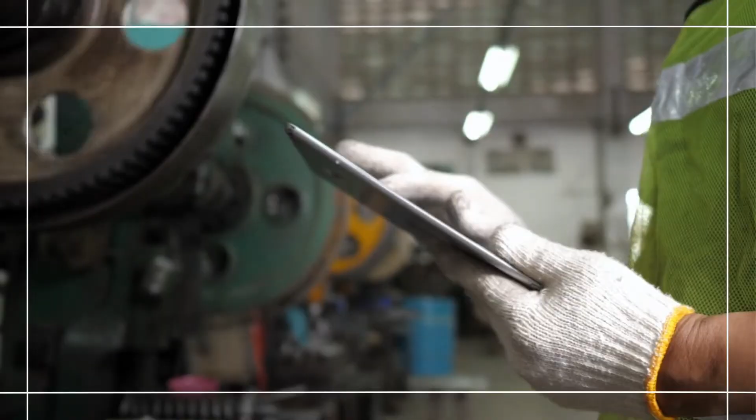Earth has been experiencing a major environmental issue. Oceans, forests, beaches, and all natural habitats are affected by an abundance of plastic litter. But plastics could be recycled more and better. With new technologies, plastic landfill stands to be cut significantly. One option is the valorization of the materials into new feedstocks, and that's where the new EU project, PLASTICE, comes in, closing the loop in the plastic life cycle.

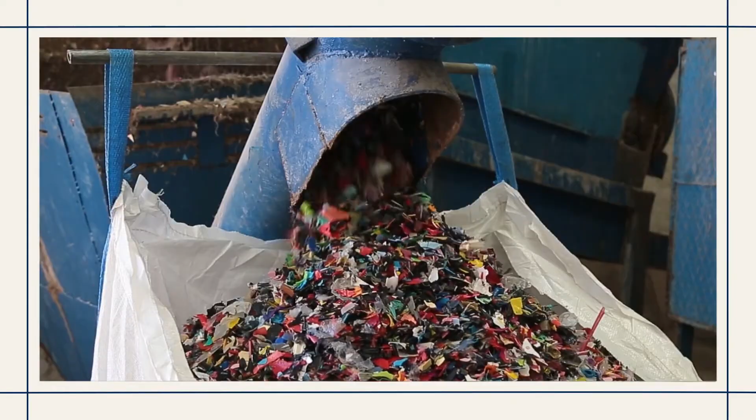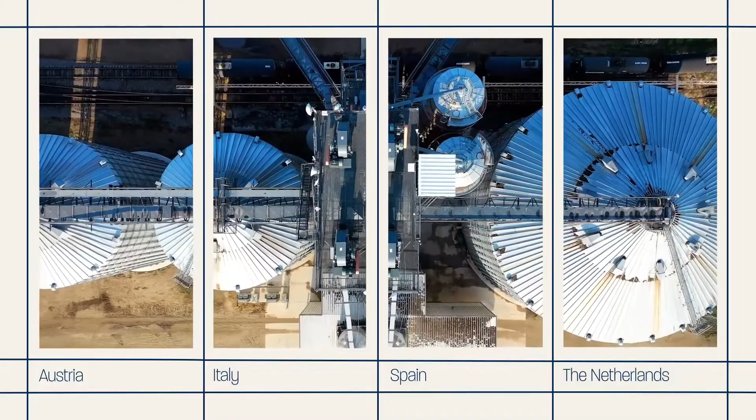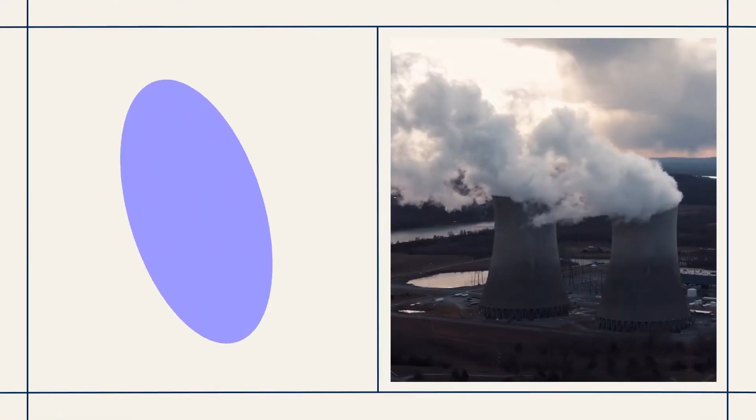PLASTICE strives to apply valorization processes aligned with the latest chemical conversion technologies in 4 countries: Austria, Italy, Spain, and the Netherlands. 4 conversion technologies will be developed at these demos, from lab scale up to real environment prototypes. Microwave-assisted pyrolysis, hydrothermal liquefaction of polyolefins, combined gasification and chemical post-treatment, and cascade enzymatic hydrolysis. These technologies aim to reduce greenhouse gas emissions by 70% overall. Learn more at plastice.eu.

So with that, we have set the stage so I can explain a little bit what we are doing in PLASTICE. We are a rather large consortium, and we have different routes where we want to use the plastic waste which is collected and sorted, and where we have different fractions. For example, we have different plastic materials where we want to use our microwave-assisted pyrolysis or the hydrothermal liquefaction to go back to pyrolysis oil.

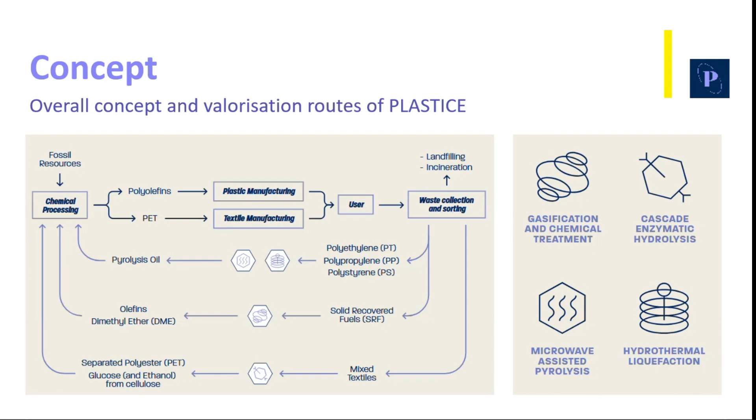The second thing we're doing is to take the solid recovered fuels and by the combined gasification and chemical treatment, we want to go back to olefins and dimethyl ether. And the third one is maybe a little bit the odd one out here because we don't put the material up to high temperatures, but we use mixed textiles, where a reasonably large component is plastics, and we use an enzymatic treatment to separate polyester fibers from glucose.

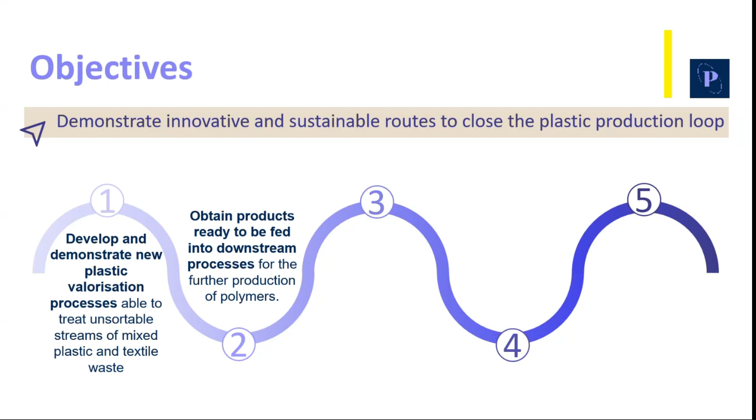Yeah, what are the objectives in our project? The first one, as it's about demonstration, is to develop new plastic valorization processes and to demonstrate them at a reasonable scale, especially for these unsortable or low valorization materials for plastics and the textile waste, because there is a reasonable share of plastics in that. The second one is to obtain products which are ready to feed into downstream processes for the further production again of polymers, as we showed before.

The third is to reduce the carbon footprint of the current chemical recycling processes, especially for the fractions which cannot be mechanically recycled. And there the animation messed up. We also want to establish the roadmap for the implementation of our solutions into the industrial realities and regions, tackling the technical and non-technical barriers. And yeah, sometimes you really get non-technical barriers in such a short project. And another is to ensure the successful dissemination and exploitation of the project. So we're also looking into the business models. Can this be feasible or not?

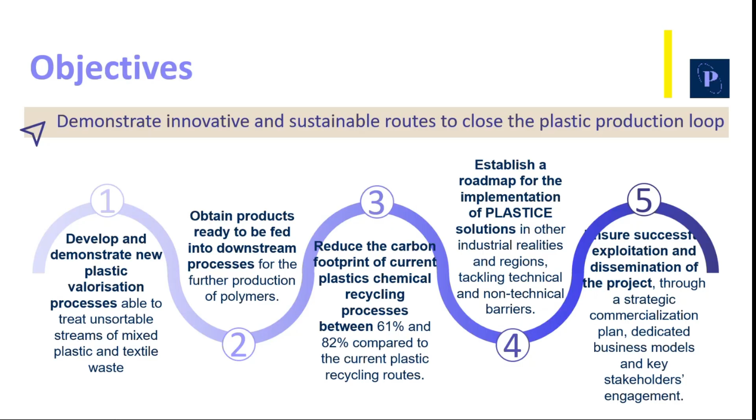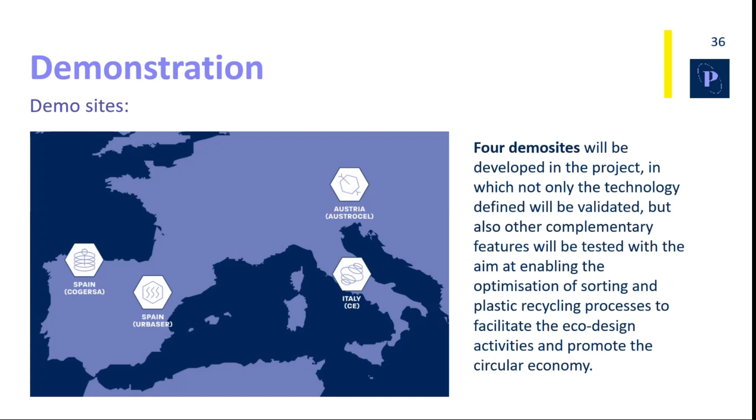Our 4 demo sites are shown here. We have 2 demo sites in Spain, one in Italy and one in Austria, where we deal with the different technologies. And I will show you in the next slides what we are doing there and what's the current status of that. First one, the microwave-assisted pyrolysis.

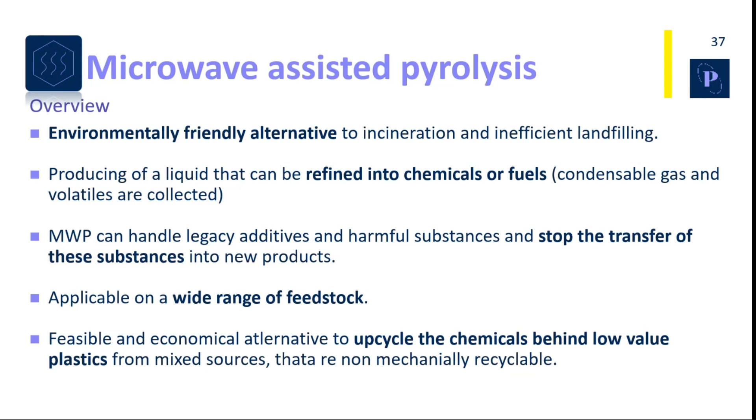Yeah, we see this as an environmentally friendly alternative to incineration, and especially to inefficient landfilling. We want to produce, as a similar approach as in your projects, a liquid that then can be further refined. And with this municipal plastic waste, with the microwave pyrolysis, when we pyrolyze the material, as in all pyrolysis processes, we don't have an issue with some legacy additives or something like that. Also, we want to apply this to a wide range of feedstock, and we see this as a quite feasible and also economical alternative for mixed plastic wastes. So what are we doing there? What's the basis of that?

We basically use microwaves as we use at home in your kitchen, but at a little bit larger energy, between 300 megahertz and 300 gigahertz, and we use that to bring the energy into the mixture. Not only the plastics alone, that wouldn't work. So we need some catalysts. We need some stuff which is susceptible to the microwaves, and with that we can heat up the material very, very rapidly.

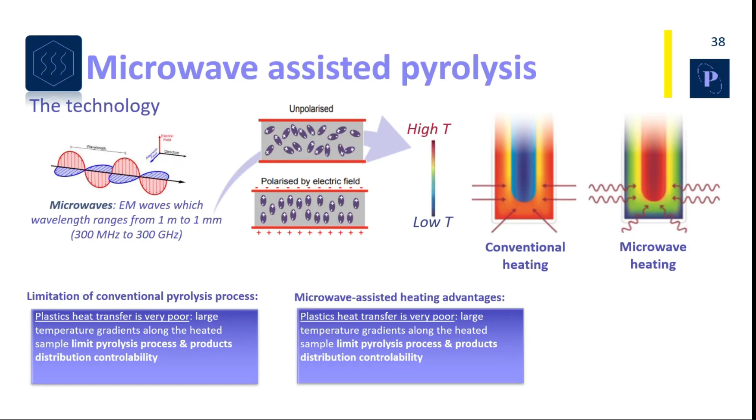With the microwave heating, as the microwaves can penetrate the material much better, we heat it up from the inside, and with that we get a very nice rapid heating. And due to the low thermal conductivity of the plastic, we have the insulation around, so it stays also rather hot.

What's the status of that? Here you can see the prototype or demo setup at the Spanish site at CIRCE. CIRCE is also the coordinator of the project. You can see here such a microwave reactor. It's a continuous microwave reactor concept.

Basically, the start was first a small tube-shaped reactor where the material was fed in. The microwaves are penetrating, and now they set it up at the larger scale with this pilot plant. So that's the current status of that. That's currently running. They're currently being optimized, and the major input they're currently looking at is the LDPE-based waste.

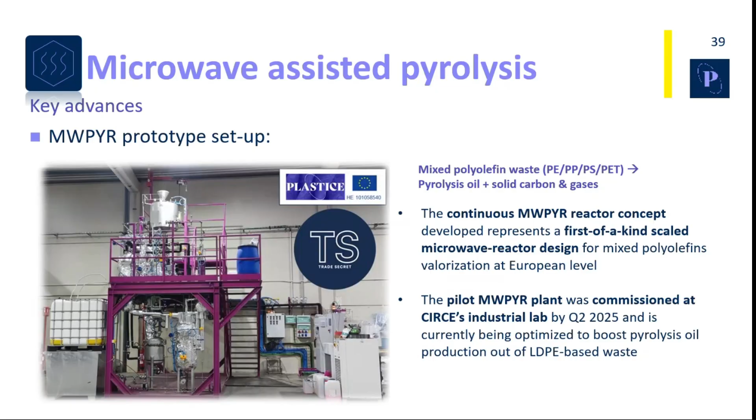So that is quite nicely working, and that can really give you pyrolysis oil and solid carbon and gases, similar, as I said, to your technologies you presented before. The next one is the hydrothermal liquefaction. That's a bit of another process.

So what we aim there is, again, the process was originally developed for converting biomass, and here what we are doing is we use hot water at very high temperatures at near or supercritical conditions to degrade the plastic. So here we have a single fluid phase then, and with this single fluid phase we can run the reactions.

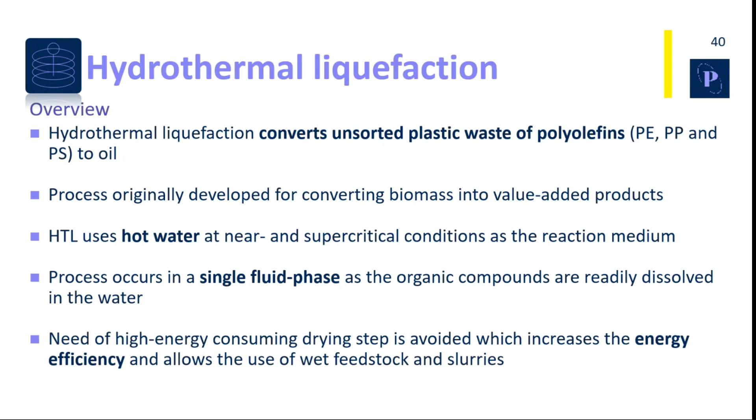What exactly comes out is depending a lot on the input, naturally. So if you have already a high inorganic content in your plastic waste, this will go to the char naturally. And it also depends a little bit on what other materials you have in there. If you stick to polyolefins, it's quite nice. If you have some PVC contaminations, that is an issue we need to deal with.

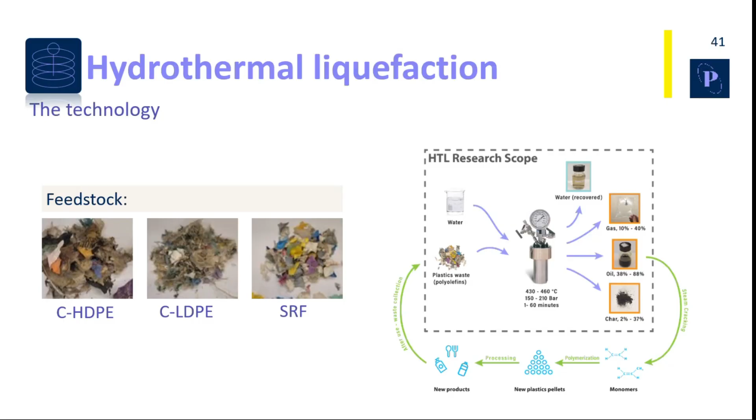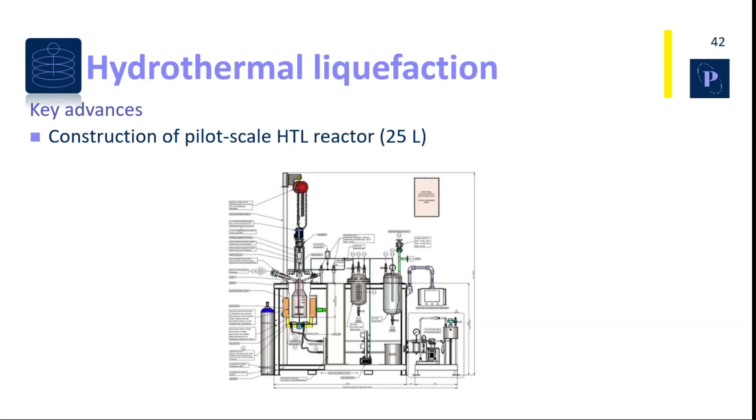So what is currently going on? Currently, the pilot scale reactor of this hydrothermal liquefaction is produced. You can see here this setup. So we would have a 25-liter reactor to run the trials and to get better insight on how to run the process.

The next process is, I need to speed up a little bit maybe, the gasification of plastic waste. That's the third technology we work on. So we start from these secondary fuels, and then we do a gasification conversion at very high temperatures of 900 degrees C, where we do pyrolysis, oxidation, and reduction in these 3 steps.

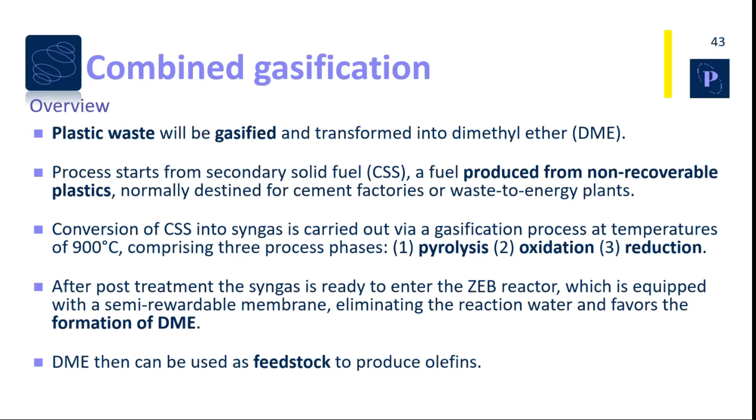And what we're aiming for are products like DME, which then can be used as a fuel or as a feedstock again. So what we can see here is we have different fractions in there, and there is a small pilot going on where we have the gasification reactor. I only can show you this cutout scheme.

We have a plastic feeding system, similar as we saw today in the tour. Somehow you need to feed the plastic material in. Then the gas injection system, and then we have the syngas treating system and the syngas analyzer at the end here in our setup.

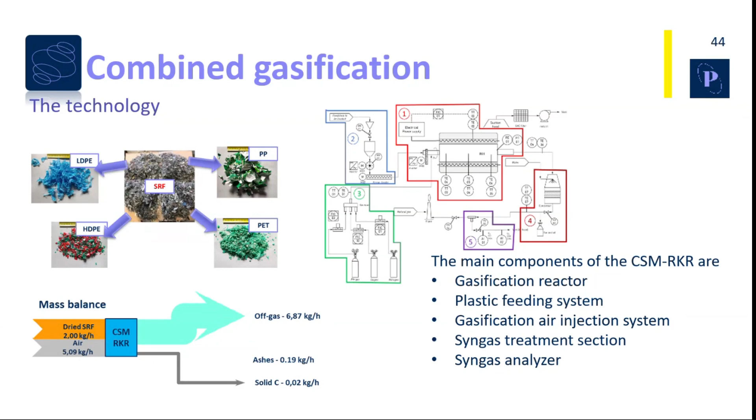To give you an idea, what do we get when we put in the dried SRF and the air? The major product we get is gas, as it's a gasification process. There are some solids and some ashes, about 5 to 8%, if I remember correctly, where valorization is still pending at the current state. We know of that. And where are we currently?

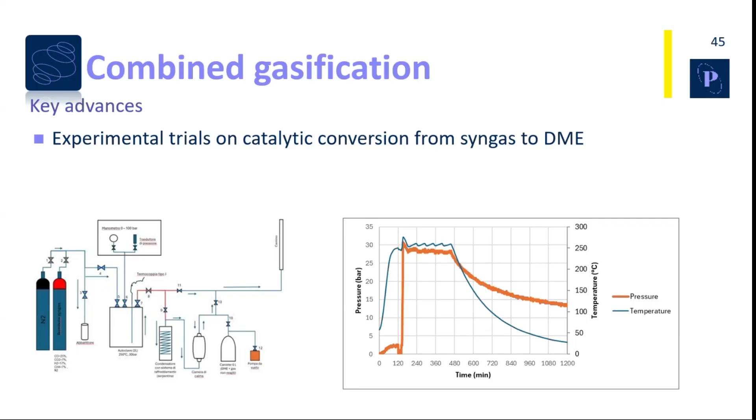So there are currently trials running on the catalytic conversion. This process again is built up, to look into how to convert the syngas to DME. The last one is, as I said, the odd one out. That's where I'm mainly working, so I'm pretty sure I can answer the questions best.

What we wanted to do here is to work with a different plastic waste stream, which is nonetheless a large one. It's textiles. If you look at the textiles we're wearing, most of these are made up of several different fibers. So usually you have cotton and polyester, or maybe polyamide and some elastane, which is a polyurethane-based fiber. And recycling that is quite hard.

Even if you have a shirt which says 100% polyester, like for football or for sports, even there are some other things inside because of the stitches and the labels and all that. So recycling that is very, very challenging. It's a large waste stream. I think it's the 4th largest if you count down what we produce as waste. And so the question is how can we recycle that?

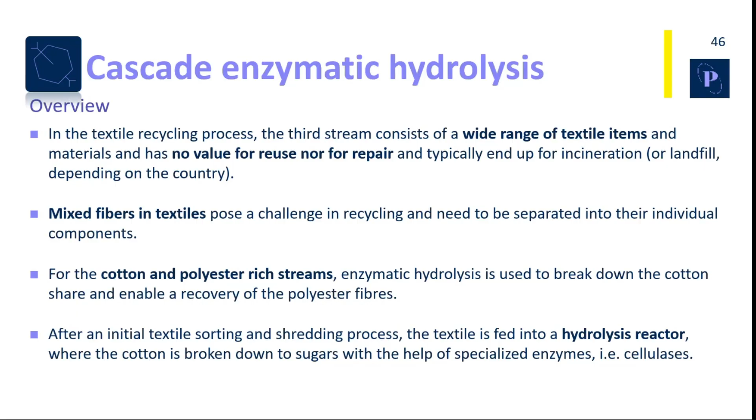We here look exclusively at cotton polyester streams, where we have a high content of polyester and a lower content of cotton. That's one of the very, very widespread combinations. And after some initial sorting and shredding process, we then use a hydrolysis reactor. So, okay, here we have the animation. I clicked it through. Oh, sorry, that was a little bit too fast.

So the concept is we take our broken old textiles. We do not take textiles which are still good for secondhand and stuff like that. We do a size reduction step. Then we use enzymes, which are basically biochemical catalysts. And with that, we break down the cellulose fiber to a glucose solution, and the PET fibers are not very impressed with that. We already checked that. And then we can separate it because one is a fiber, the other one is in solution. It's a rather nice process.

And then with the PET fibers, we can go back to polyester recycling, mechanical recycling as we know it. The glucose solution can be used downstream. We do not tackle that in the project directly because one of our partners, Austrocel, has a plant in Austria where they are producing bioethanol, and they will be capable of feeding that in. So the route is already there. It would need some cleaning steps before, but it is already established, so we don't need to do research on that.

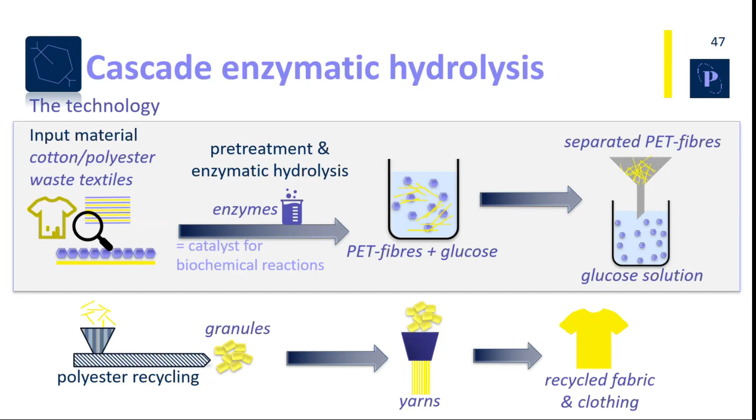So we also have the idea to use soft sensors like the energy input of the stirrer to monitor the process, and we are capable of doing it in about 18 to 24 hours. It depends a little bit on the exact composition, but after 24 hours at the latest, we have managed to degrade the cellulose so we can wash it off, and then we get the fibers. And we have even demonstrated with our partners in Turkey going from the textile back to granules, back to fibers, back to a textile again. So that is already in there.

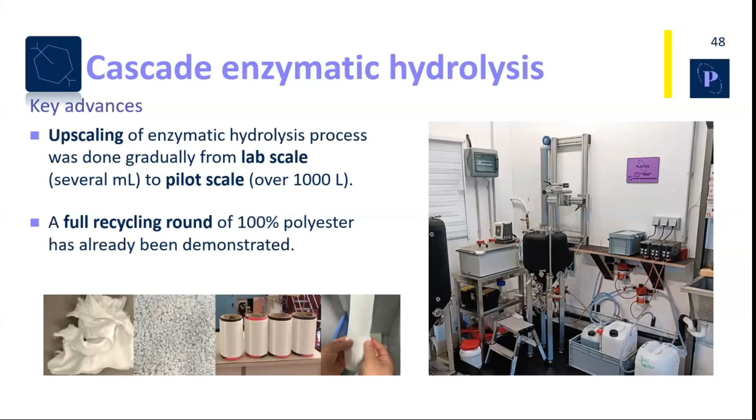Also, the larger trials are running at Austrocel. They have a pilot setup with a 1 cubic meter vessel where we can do larger trials with, let's say, 100 kilos or even a little bit more of textile.